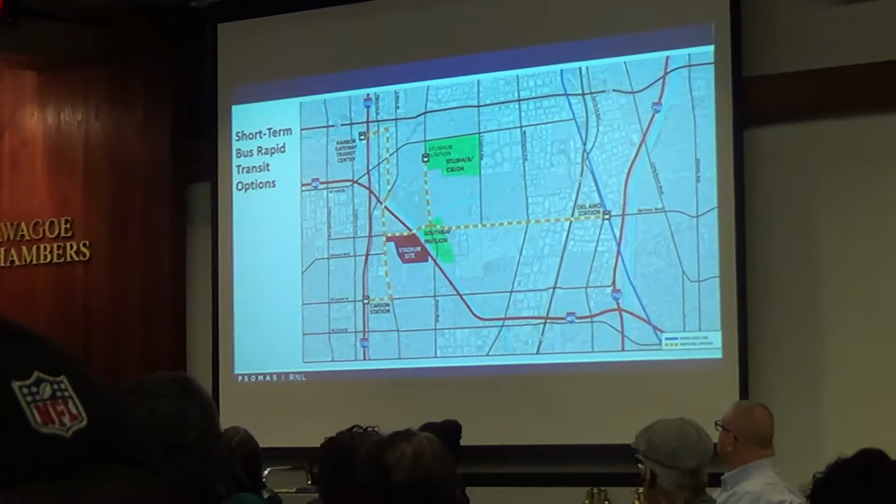This map will give you a little orientation. This shows the stadium in the center in the orangish-red color. On the east side, we have the Del Amo station.

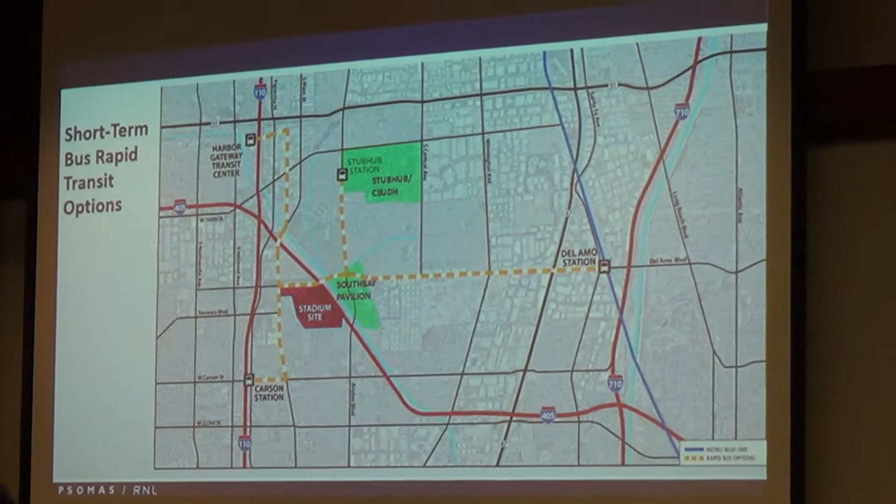This will demonstrate the short-term bus rapid transit options, ones that could be implemented immediately for the stadium and help with moving people in and out of the stadium very quickly. We would come from the Del Amo station and run a bus line straight across on Del Amo, and that line would go to the stadium.

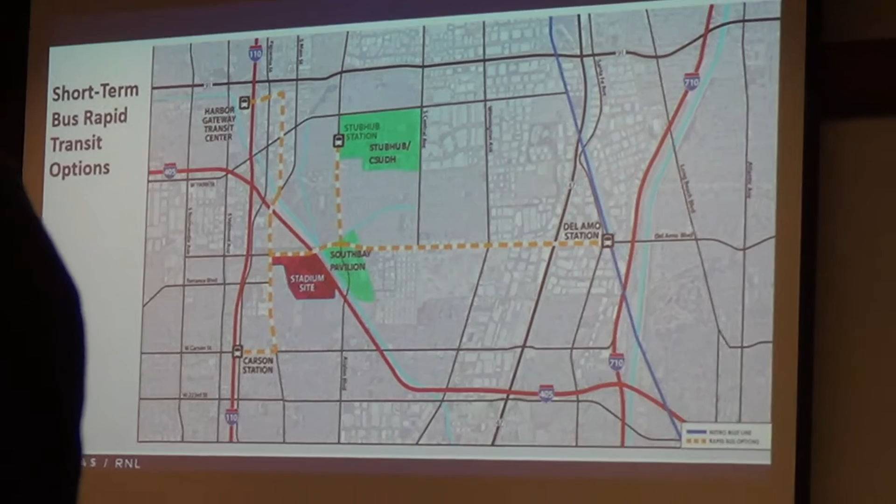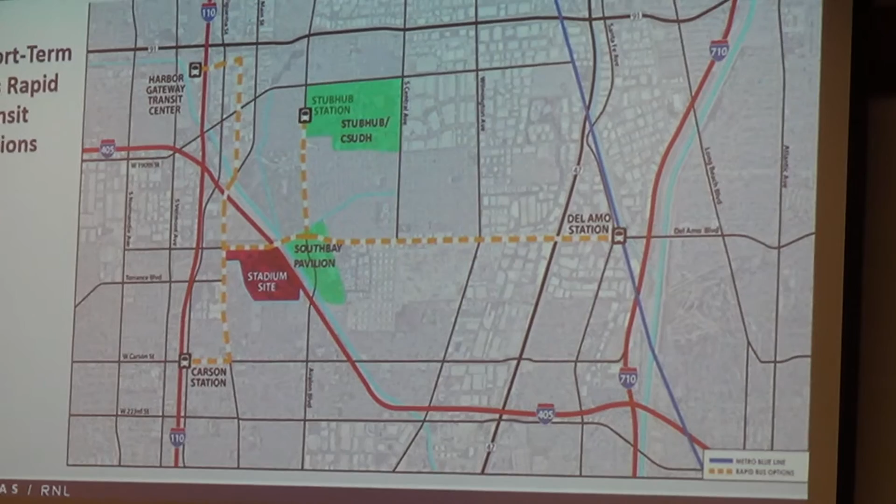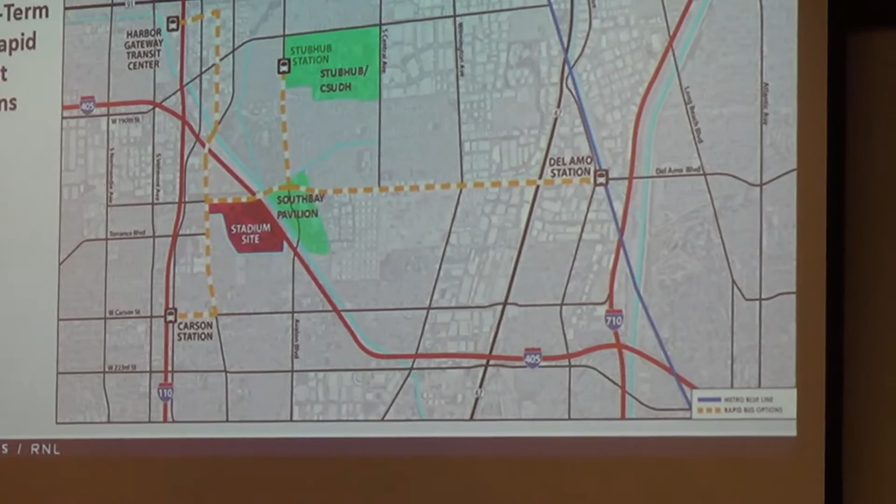It would also stop at the South Bay Pavilion. It would then move into a line that would go north and south, from the west side at the Harbor Gateway Transit Center, running south, and also picking up traffic from the south end at the Carson station. There's also a segment that comes up from the South Bay Pavilion that would go to the StubHub Center and provide access there, and also for CSU Dominguez Hills. So this is something that's very easily implemented and one that we're confident could be started right away.

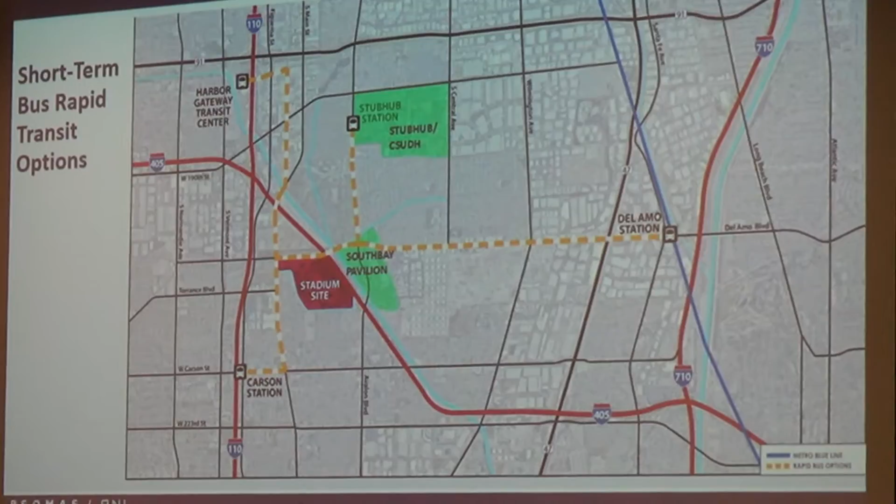To implement this, we would recommend articulated buses for increased capacity during game days. These buses seat up to about 57 people, and with standing room you can put about 80 people on these buses. We would recommend looking at energy efficient, battery powered or hybrid type buses for this use, and be very environmentally conscious. We know that's important to the city.

So now we'd like to go over some of the longer term options, for rail transit. These would come along as the stadium is in place and as there's opportunity for funding. On the east side from the Del Amo station area where the Blue Line is now, we would recommend a rail station that would move from east to west to the stadium, and eventually move all the way over to a new station at the Crenshaw station, which would also be part of the planned expansion for the Green Line for Metro.

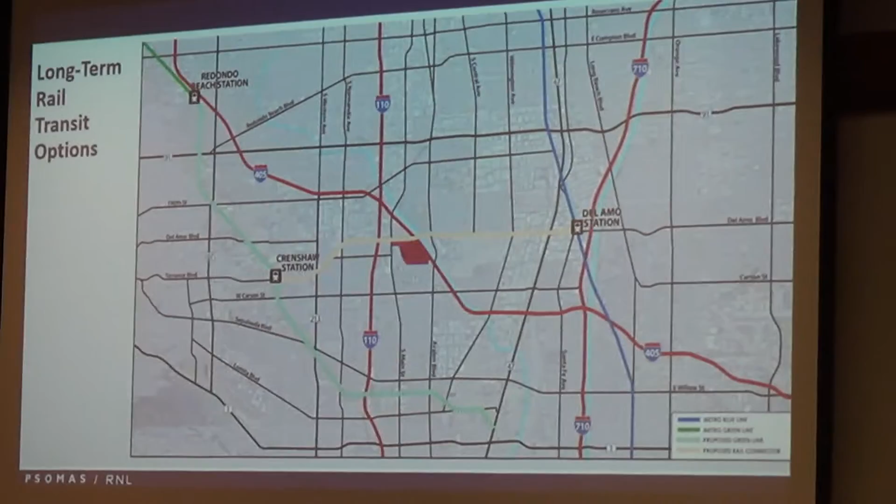So we would have access from either side, east and west, via the two different rail lines that are in place, which will really help ease the congestion and bring people into the stadium very quickly and efficiently. We would also keep the bus station that would run up to StubHub and the Dominguez Hills facility, which would help that facility too.

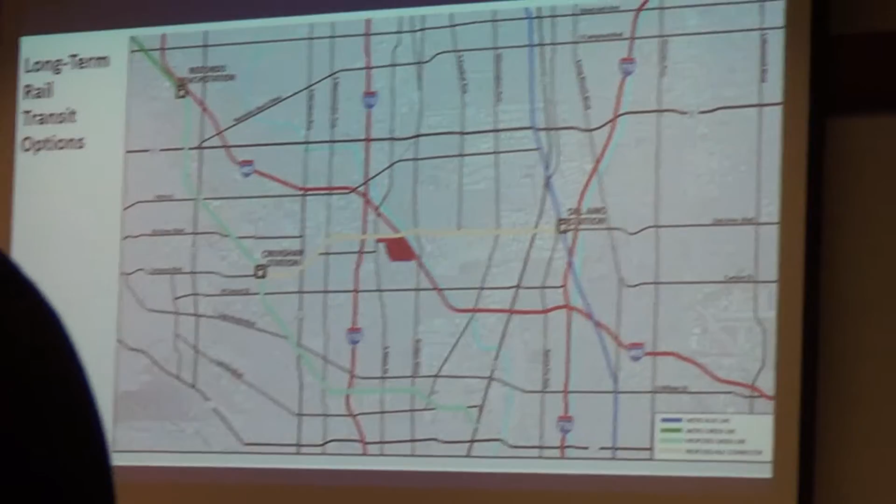The goal would be to utilize these existing stations to make access from the airports. John Wayne is 28 miles from this location. LAX is only 13 miles. Long Beach Airport is 10 miles, and even downtown LA is only 17 miles from here, so we'll make the access very efficient with the rail.

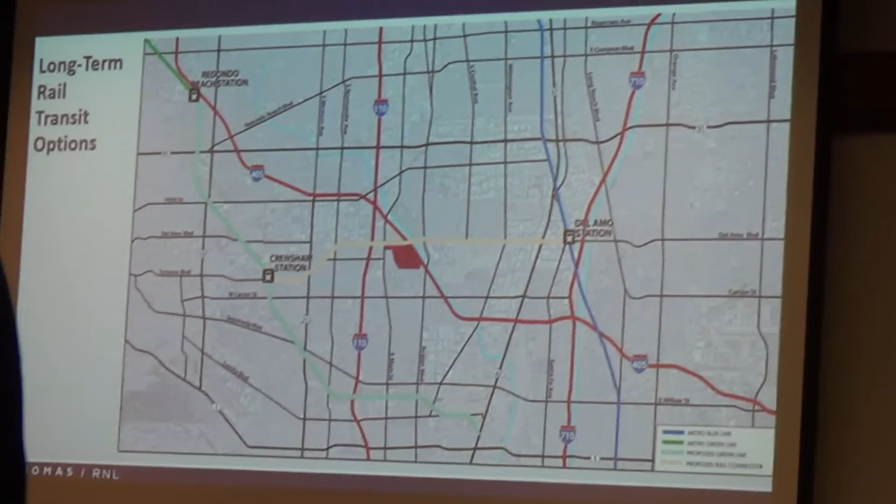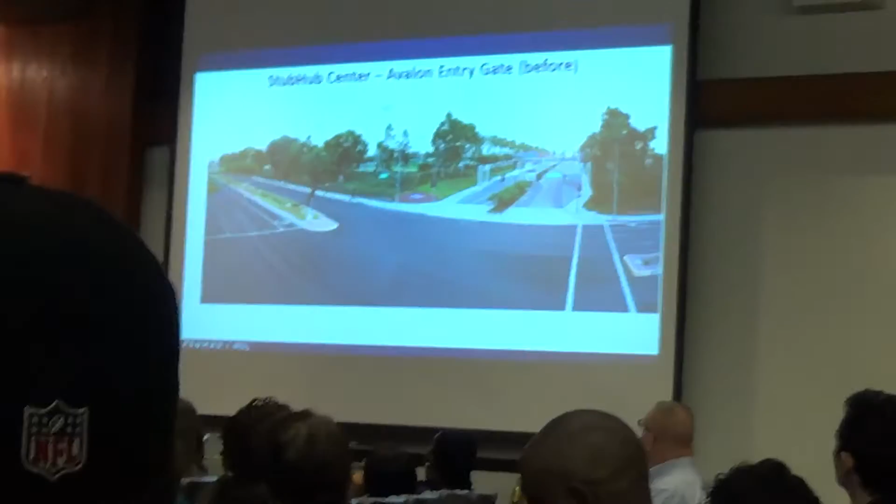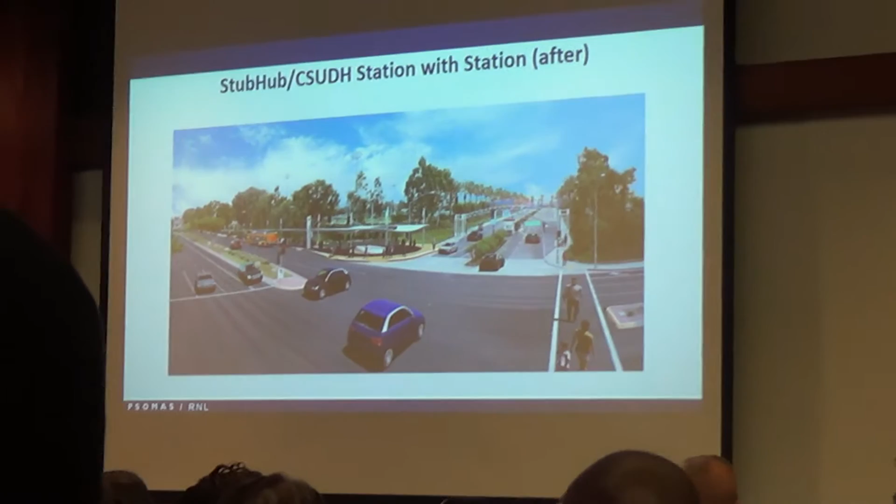Now I'll talk a little bit about the StubHub Center and Dominguez Hills, and the ability to help the congestion in that area, which can be very busy now. We took a look at the existing Avalon Gate entry, and this is a picture of that facility as it is. We did a view of what this might look like in the future with adding a station right there. I'd like to have Phil talk a little bit about that right now.

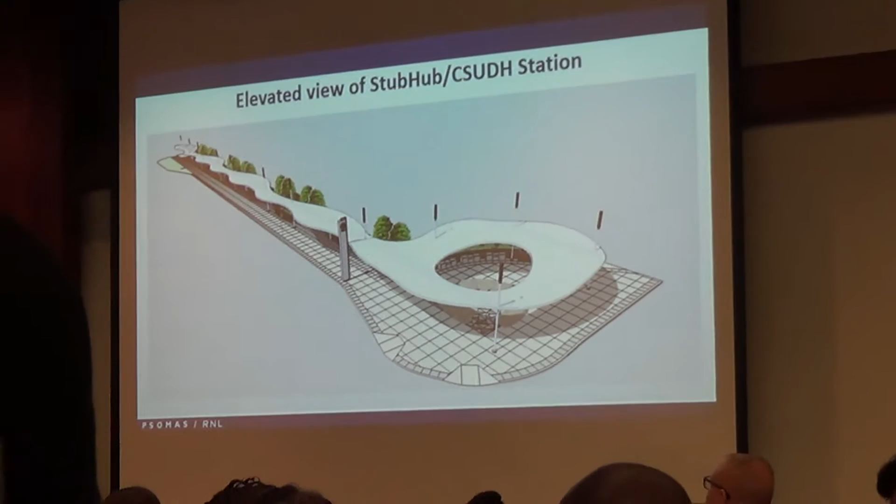Thank you, Byron. So what we're showing at this entrance off of Avalon is a concept for a 4-bay integrated bus facility, which would allow for 60-foot articulated buses, which Byron showed earlier. Each platform is about 100 feet long, so it could be about 400 feet long overall.

What we're showing is on the southbound side, but it could also be on the northbound side. It would serve game day shuttles, local and regional buses. We're showing an upgraded facility with integrated shelters, shading devices, wind screens, individual seating at each bus bay, retaining walls, planters, lighting, and information signage.

The continuous canopy we're showing is just a concept to reflect the roof of the stadium, the tensile roof structure. We're also showing plazas at the corners to give a sense of place and integrate the project into the landscape.

Thank you. And now let's talk a little bit about the new Los Angeles stadium in Carson.

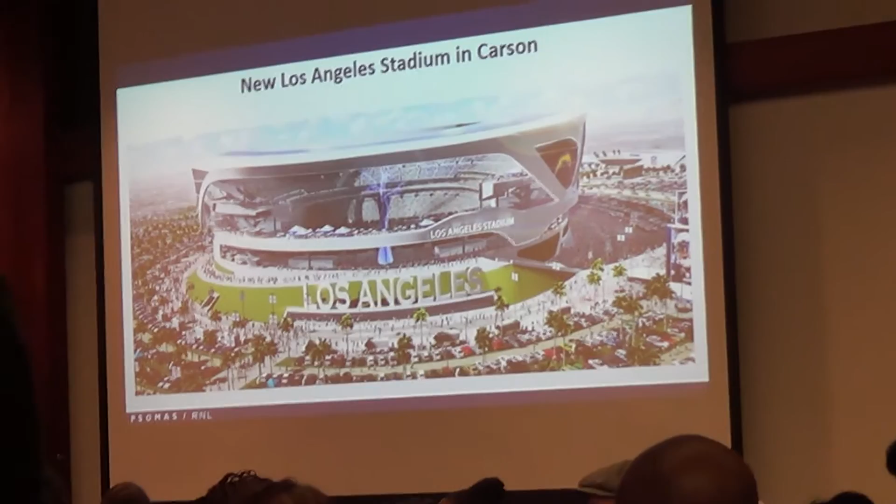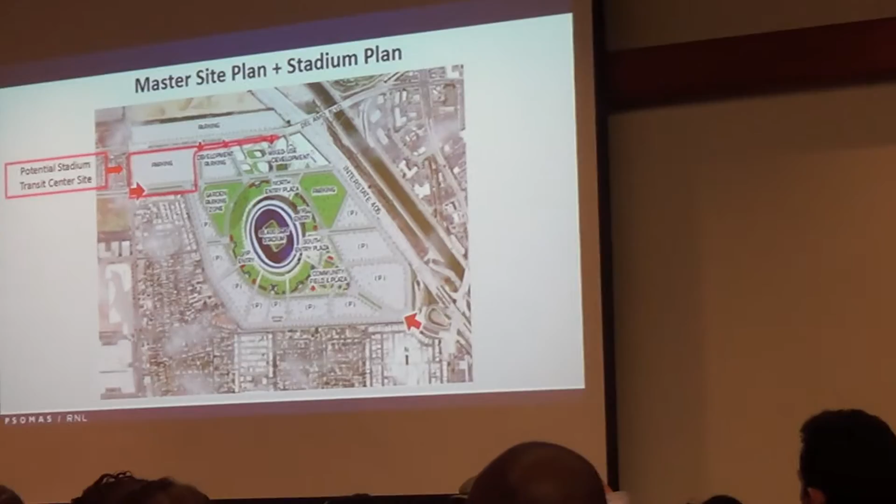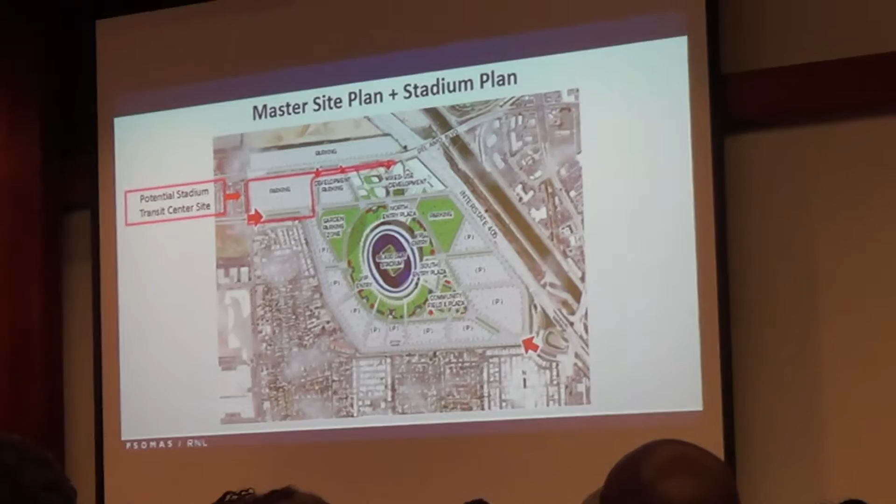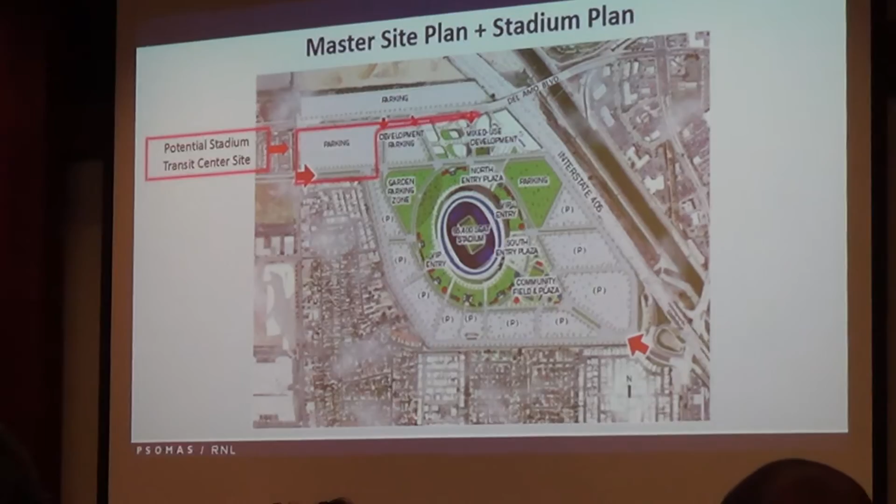We'll talk about what some of the transit options are right at the stadium site. The next plan shows the master plan, which we developed with your team and city staff for the stadium. To orient, Del Amo Boulevard is on the north end, and that's where we envision the transit facilities, probably somewhere along Stadium Way that's there now. It's a little early to pick the exact location, but we think that might make good sense. It would be a short walk from the station into the stadium. This area would also be adjacent to the existing planned development and some of its parking, so it could be multi-use during non-stadium event times.

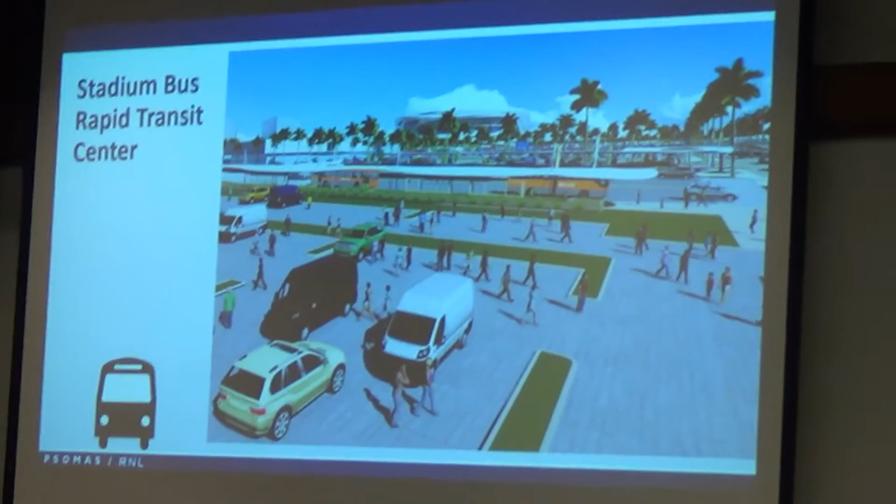Next, we'll talk a little about what the actual station might look like right at the stadium. We're basically using, for this study, a similar footprint to what we showed at the StubHub Center. We know the existing roadway and freeway conditions work well and help alleviate traffic. This site is pretty comfortable and safe. This footprint and profile looks like it could accommodate many different options, and it's really just about a 5 to 7 minute walk from the stadium. We're showing on either side of the street, for eastbound and westbound traffic, 2 to 4 bus bays.

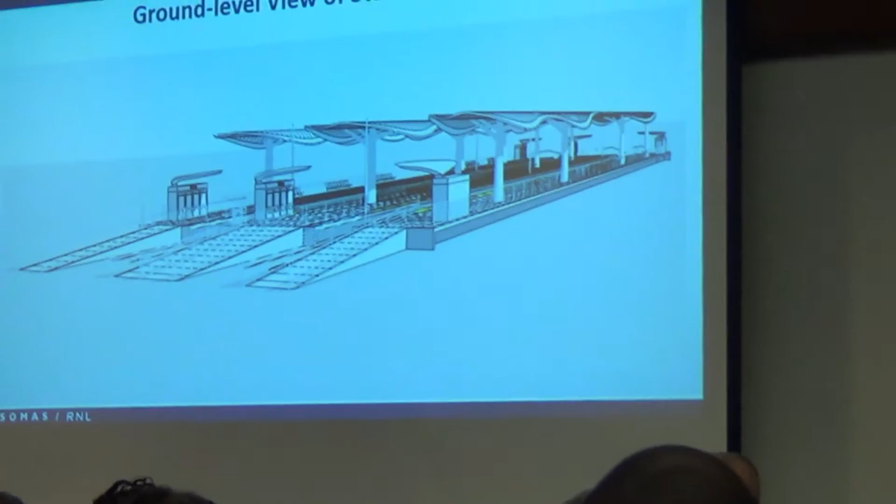Now onto the rail transit station. We're looking at the same site, showing the light rail station on the opposite side of the street. The typical metro rail station usually has a single center platform, allowing trains to pull in on either side and passengers to get on and off into the trains. To accommodate game day pedestrian traffic, we'd probably need to add another platform on either side, so we're showing 3 platforms total. When a train pulls in, doors open on either side, allowing queuing for a massive amount of people to get on either side of the train at the same time. What you see here is the rendering with the 3 platforms, the center platform, trains going in on either side, and ramps up since these are slightly elevated platforms.

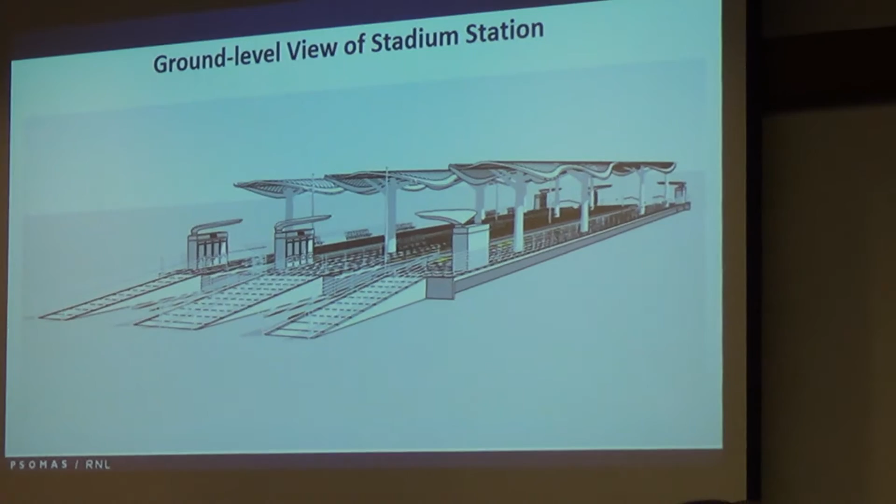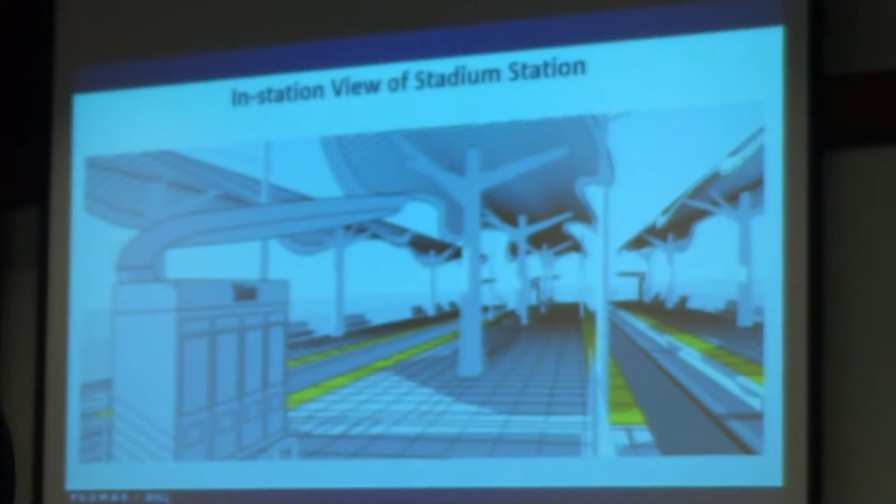Ticket vending machines as you walk in. Lighting, and we're showing a fun canopy that relates to the stadium itself. These platforms are usually about 270 feet long. In this case, we're showing entrances on either end to allow for the crush of people coming in. This shows a bit of a close-up. Typical amenities would be lighting, signage, seating, and again the ticket vending machine.

So those are the options we've studied so far. We think we've come up with some good solutions. There's certainly more work to be done, but we think we can improve circulation and bring fans into the new stadium as soon as we're ready to go. Thank you.